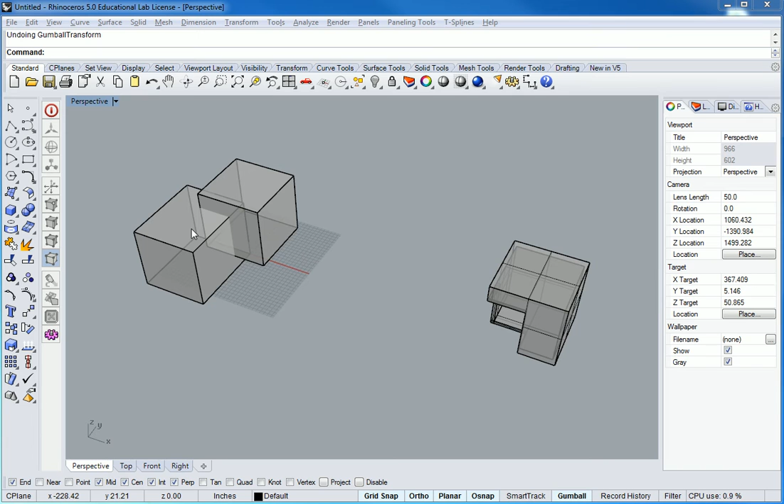All right, so if I want to take this object and place it on this one, I'm going to have to give some thought to that. So here's what I'm going to do: I'm going to copy this one over, so that it's lined up exactly the same.

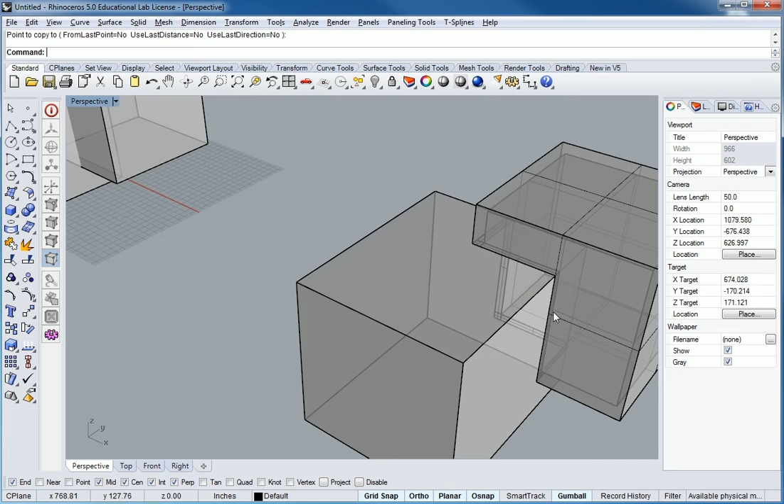One of the things I can do, if I was doing this by hand, is take a pencil and draw along this edge all the way around. Can you picture that? So I'm going to do that here with just lines, not a polyline.

Line, I'm going to go from - I've got to make sure I'm getting right to the intersection. So line from this intersection to that intersection. As a matter of fact, for these types of operations, you want to work in shaded mode, not the other mode.

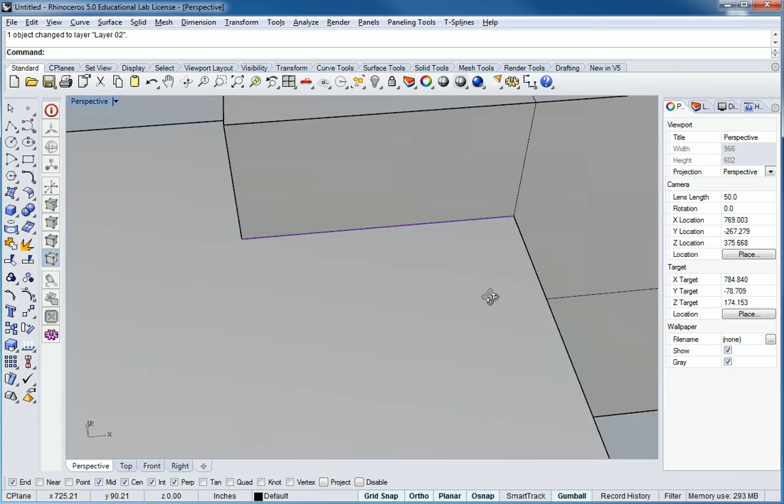One other thing, I think I'm going to change the color of this stuff to maybe that blue or that magenta color. So there I can see that magenta color, right? All right, let's do it again. Line - and I'm going to draw a line all the way around on this thing, okay?

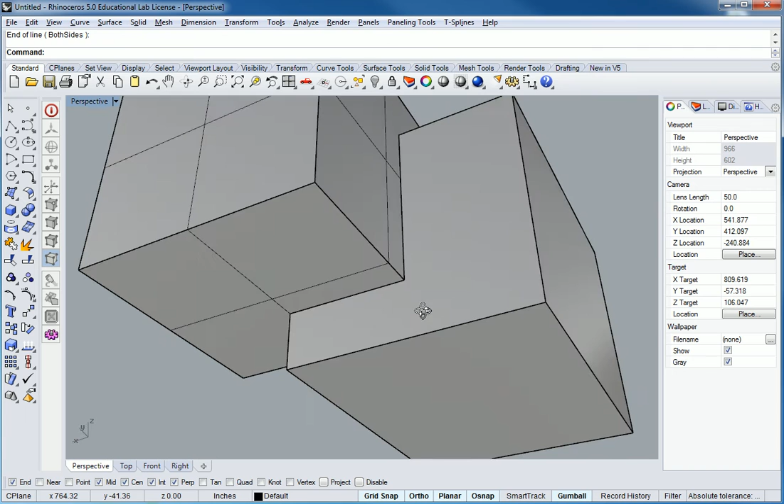Did you guys learn show and hide? Okay, so I'm going to hide this one. And let's see if we have them all. No, we don't - I'm missing that one edge.

Actually, I want to make these all purple. Okay, so here is the last one I need to create across here. So I'm going to show that, and let me draw that last line.

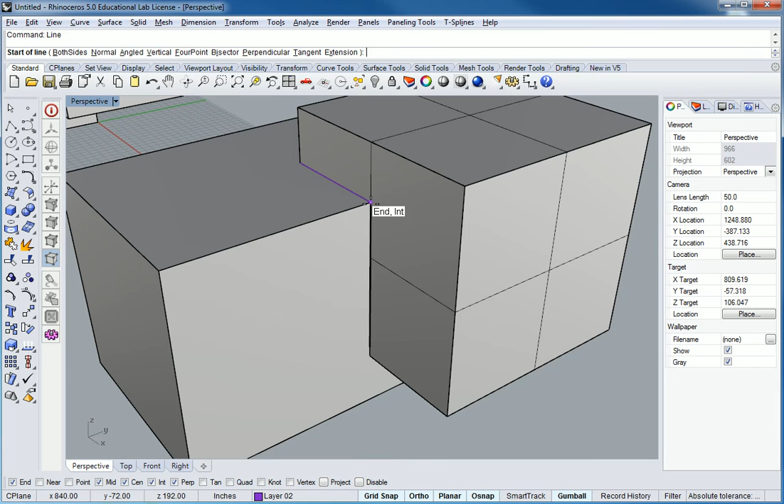Line. You have to be very careful when you're doing this because there's a lot of points that it'll jump to.

All right, so now let's once again hide this one. And if I cut that corner out, will those two pieces fit together? They will not. What'll end up happening if I cut this box right now is, if it was a physical thing, the thickness of that wall would be inside of here, so it would just fall down.

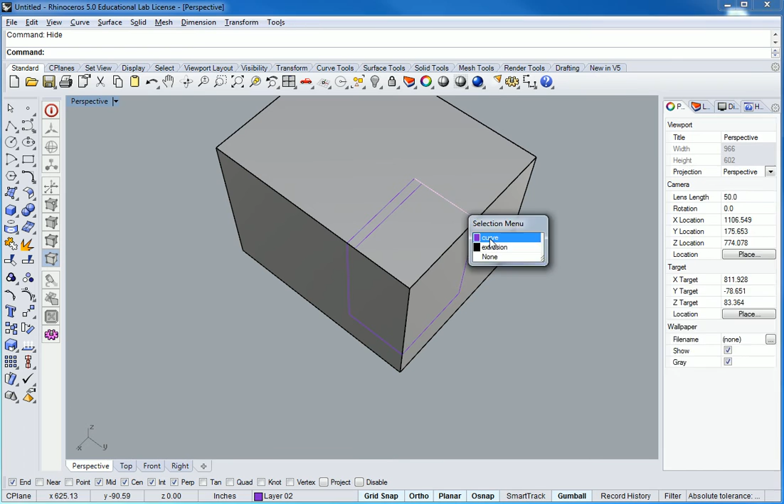So in order to get this to work, we've got to take all of these lines and copy them 9 inches in. All right, so there's one - do this one: hold the Alt key, click here, go down, go over 9. I'm going to use the Alt key to basically reconstruct all these lines 9 inches over.

Click on that. Alt key - this time I'm going up 9. I'll do that one.

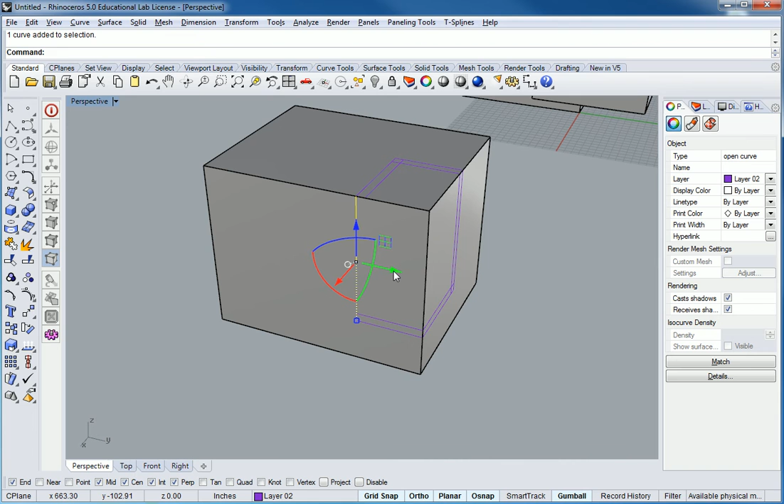Did you guys learn to use the Alt key? The Alt key essentially makes a copy of something - let me show you how it works. You click on an object until you get the gumball. If I just click on this and type in 9, it's going to move over, right? But if I hold the Alt key before I click this and type in 9, it makes a copy. So the Alt key essentially turns the gumball into a copy tool. All right, so there I have my new set of lines.

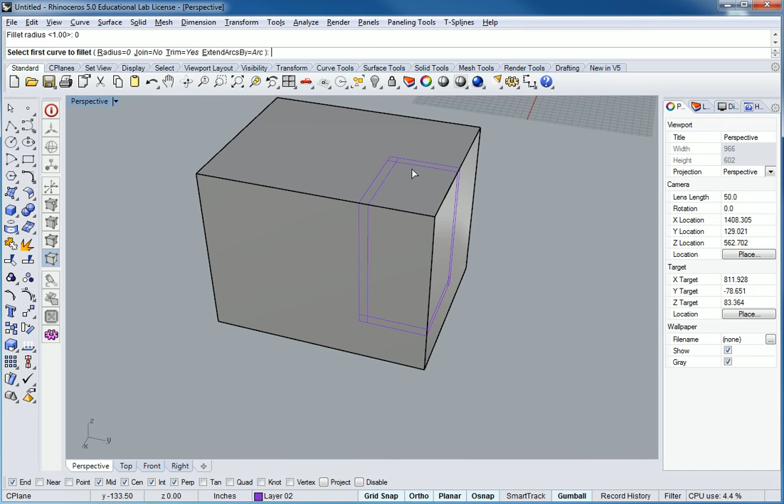So now if I were to cut - actually, did you guys learn to use fillet? So if you have lines and you want to fillet them, you can set the radius to 0, and then you can just join any two that are overlapping. You click on one, then click on the other, and it cleans the corners up for you.

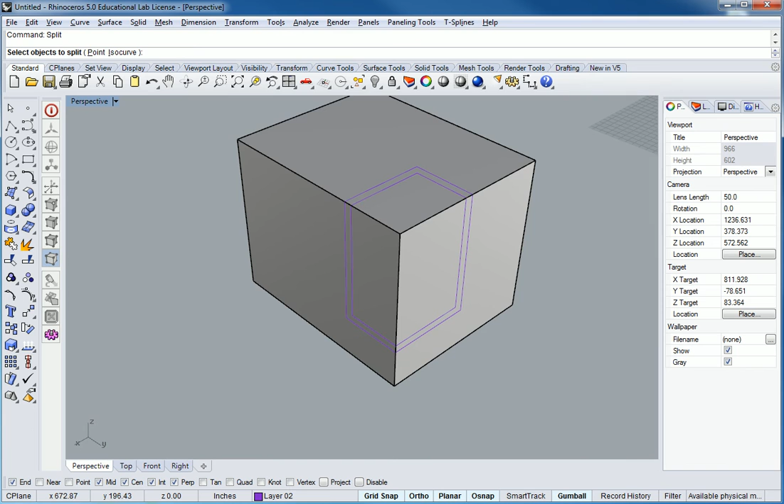Nice, huh? Okay, any rate, so right now if I was to take this object and split it by the other one, then it would have a surface for those walls to mate up with. So let me see if that works. Split - take this one and split it by these lines, the inner lines, not the outer lines. Enter. Now I'm going to delete that part.

All right, and so now when I type in show and put it in ghosted mode, now you can see that it has that amount of overlap to sit on. Let me show you what that looks like when I bring this thing up. See that? Can you tell?

And that's what you guys are going to be doing by hand in just a moment in the other class, with those exact dimensions, by the way. But first, what I want you to do is do it digitally. I've got one last thing to do with this.

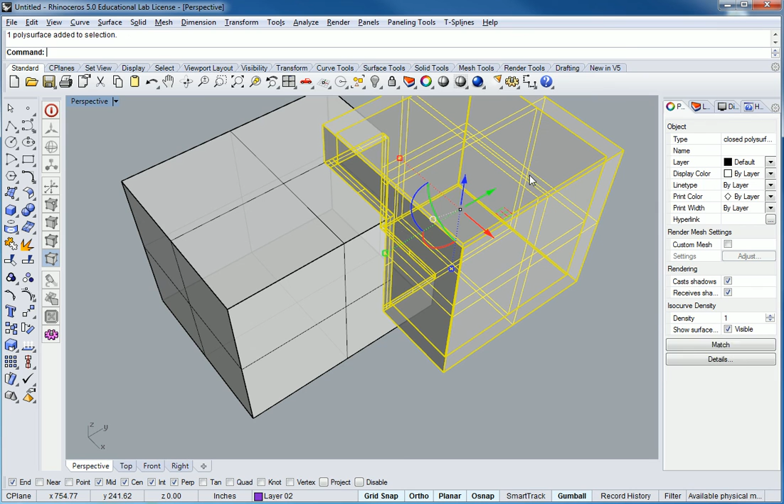So I'm going to hide this one, and I'm going to do the offset surf on this. Hero, I'm almost done in here - I'll be done in 5 minutes. You guys can have the classroom.

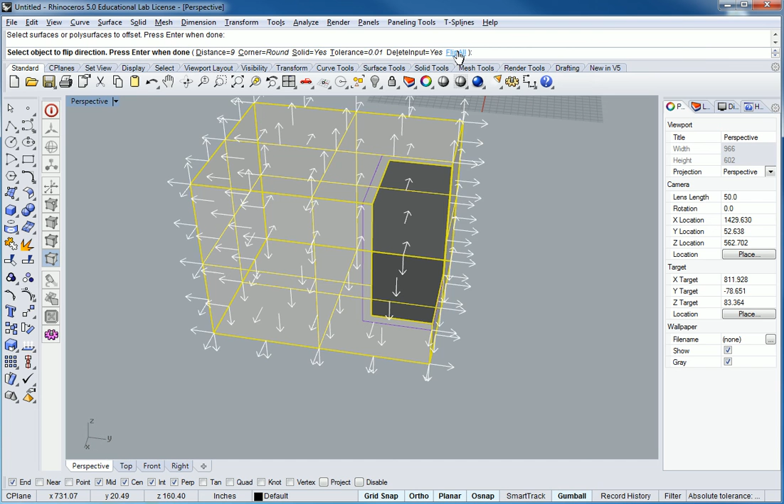So offset surf, 9 inches, flip all. And so there's the two pieces that you guys are going to end up with as far as physical form. And you can see where the overlapping component is.

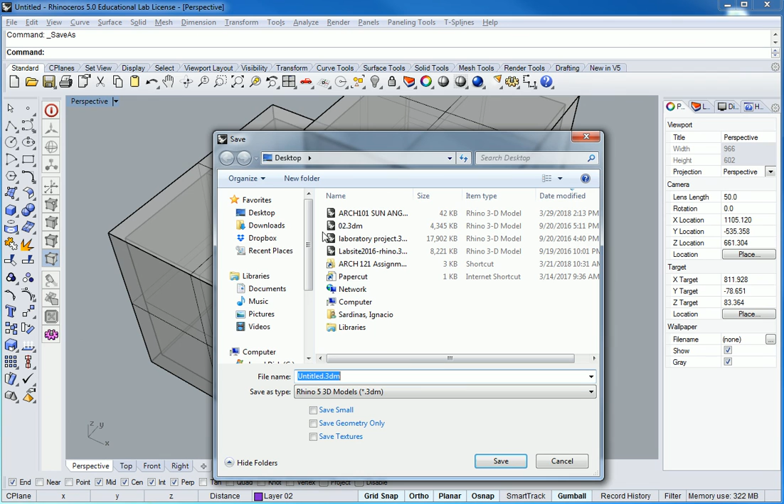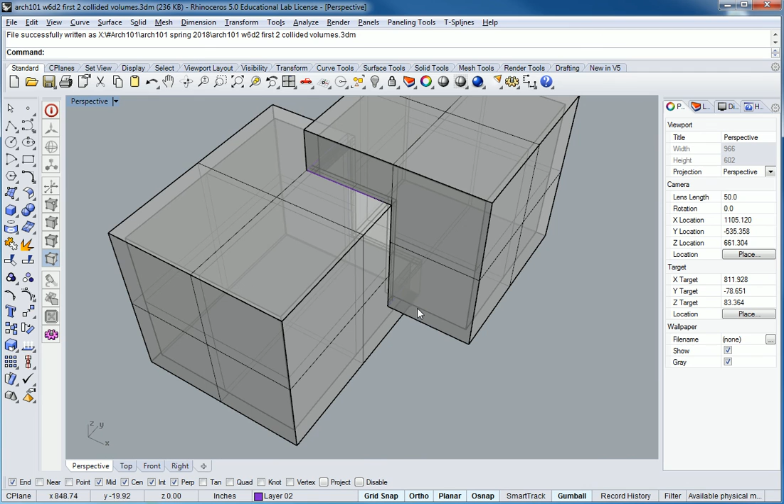All right, so I'm going to save this - file, save as. And I'm going to go ahead and put it into our folder so that it's there for your reference. Okay, so that's that. All right, let me stop this recording.